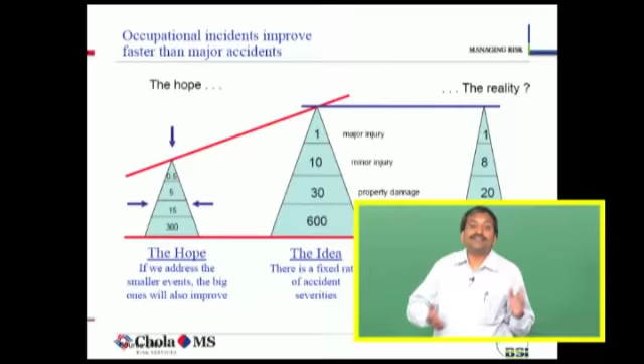That means if somebody has to break his hand or leg or something, before that there will be so many incidents, but people will not notice that this is happening - it is kind of a near miss, and then ultimately one big incident happens. This was a long time back, a study was done, but in process safety unfortunately the ratio is not so large - every 11 process incidents can result in a fatality. I hope you understand the difference.

Now a lot of research is going on about what is meant by process defect. If a safety relief valve pops up, is it an incident? Because it just popped up, pressure is more, it popped up and then again sat back, right? If it is continuously happening, then do we need to investigate? Is it an incident? So today there is no mechanism, or there is no way that we are capturing those process-related incidents. That is where the trick lies.

If the research is going on, how do we capture those process defects? Process defects - again you need to define what exactly you mean by process defect. If 1 kilogram of something comes out of an overflow, can it be called a process defect? Can it be failure of some XYZ mechanism? That is something we need to look at.

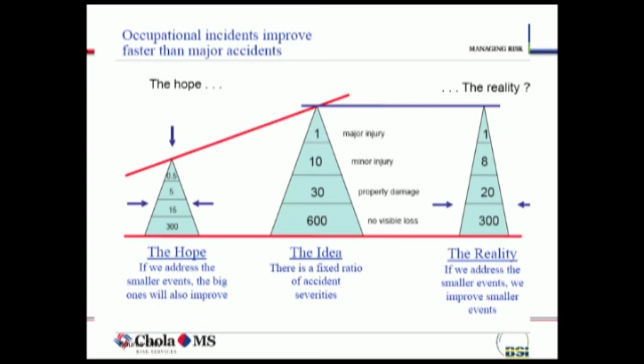So I hope you are able to get the relationship between the both. In process safety, the ratio is 11:1. In case of industrial safety, normal safety, the ratio is anywhere between 300 to 600 to 1. So this is the major difference you find, that is the reason you find that we need to concentrate more on the process safety area.

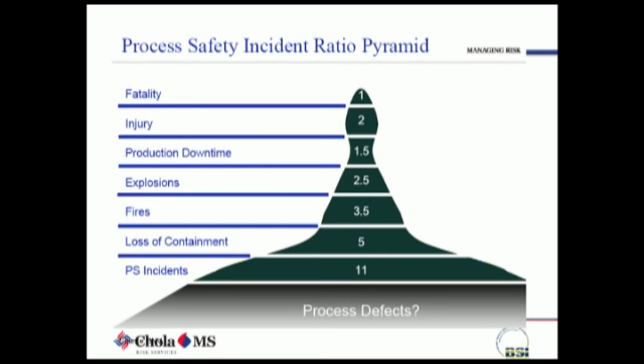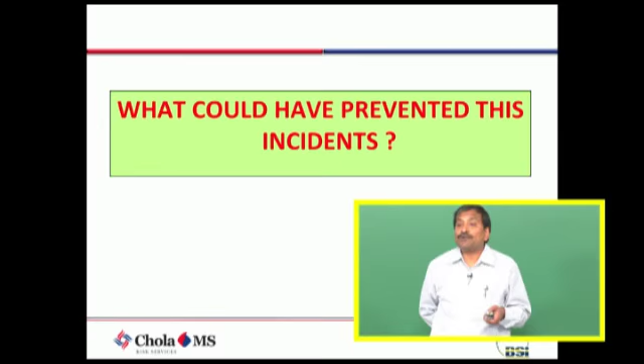Now, what could have prevented these incidents from happening is something that question will ask. So just being aware about process safety, will it produce those results, or do we need to do something more, is something that is important.

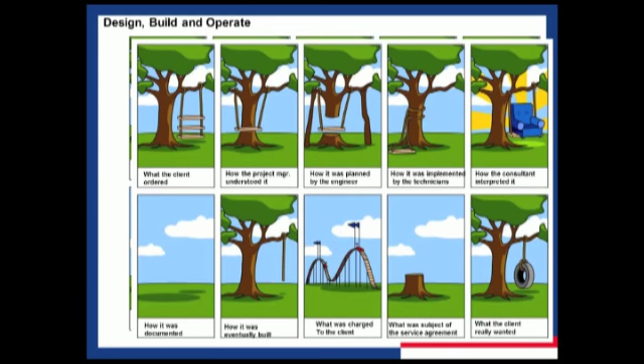Every time a designer designs things, everyone will have their own imagination to implement it, then in the process something else happens. So in process safety also you will find this kind of thing finally happens, and the design many times it fails.

So there is a broad definition of what is process safety management. I hope this was not covered earlier, correct? Covered? No. So what is process safety management? It says proactive and systematic identification, evaluation and mitigation or prevention of chemical releases that could occur as a result of failures in process, procedures or equipment.

So broadly what it is saying - process means the hardware part of it, say temperature, pressure and other things. Procedures is the software part of it, SOP, safe operating procedures, or how do we run the plant kind of thing, and equipment. So what can result in a chemical release?

The point that needs to be noted here is that process safety management quietly evolved as a result of major disasters in the chemical industry. But now the trend is that process safety management is getting applied even to the engineering industry, even to oil and gas, even to steel it is getting introduced.

Because process safety management talks about proactive and systematic identification, evaluation and mitigation of process, procedures or equipment, all three things are there even in a steel plant.

If you look at some of the steel plants, there is a big blast furnace gas handling system. They also generate oxygen in a big way. They also handle molten metal in a big way, which has a lot of hazardous properties and a lot of chances for big incidents to happen.

So in broad, what they are saying is process safety is a blend of engineering and management skills focused on preventing catastrophic accidents, particularly explosions, fires and toxic releases associated with the use of chemicals and petroleum products.

So if you recall, I differentiated between a normal safety incident and a process safety incident. Do you remember those two words? What are the two words I talked about? Anyway, difficult to remember, I will give you a hint - one is probability and severity, right?

In PSM, how are probability and severity linked? Probability is low, severity is high. In safety incidents, probability is high and severity is low.

That's the 600:1, 1:1 ratio. So that is what we are saying - catastrophic accidents means the severity is quite large. We are not talking about a small 1 kg vessel rupture or anything. We are talking about big releases, big incidents which can cause a lot of loss of lives and property.

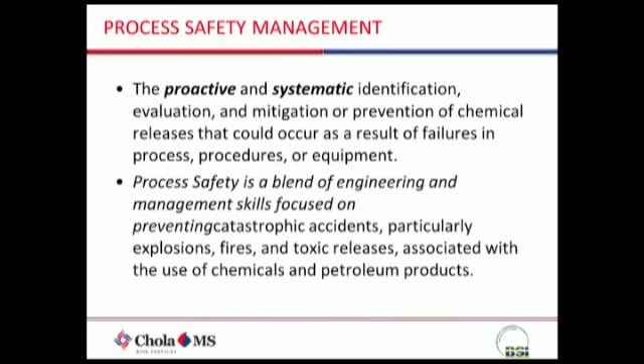See, actually after the Bhopal gas tragedy, a lot of work started on PSM, because one thing that was felt is that normal safety systems are not able to predict this kind of major accident. So there should be something more that needs to be done.

So we will come to the elements part of it. In the elements, you will find a lot of elements look very simple, and you will wonder why PSM gives a different color, but the way it is applied is something which makes a difference.

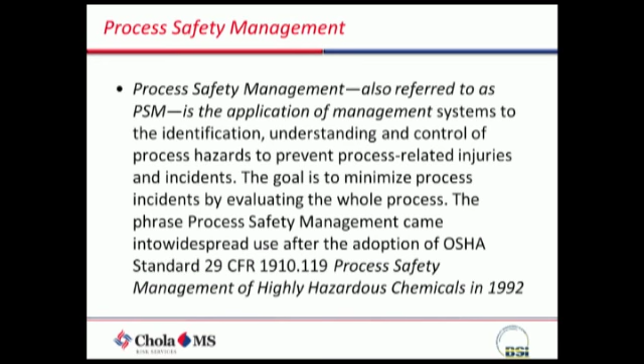So because the system is not functioning properly, I think you have seen that video of Texas refinery, where you have seen that the basic measurement was not proper, and it was filled for more level than what the instrument can gauge and all that. So they are relating it with abnormal conditions that can happen because the process conditions are not correctly controlled.

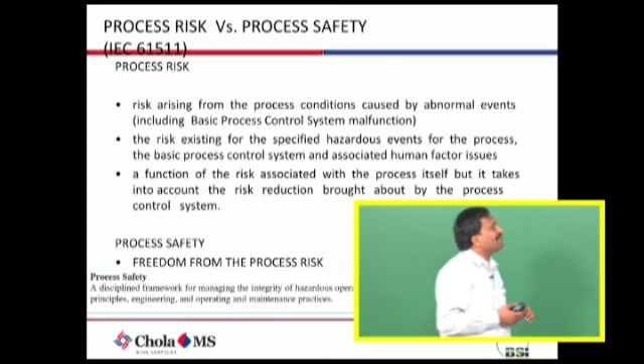Then the risk existing for specified hazardous process events for the process, the basic process control system and associated human factor issues, is a function of the risk associated with the process itself, but takes into account the risk reduction brought about by the process control system.

See, what happens is, when you broadly define the risk, everyone will ask, okay, so we have this control system. If this control system fails, then we have some other containment system. Even if this containment system is having some problem, then we have other control systems to mitigate the risk. Then why should we worry so much? So what happens in process safety is when you systematically evaluate the various risks, you will also give credit to the existing risk control measures, right.

I will make it very simple. Suppose this building is there, what can go wrong in this studio? It can catch fire. Now if it catches fire, then what happens? Everything gets destroyed, right. So what is the basic control measure that is there? Fire extinguisher is after the fire starts, but first detecting that there is a fire. So you will find some smoke detectors and other things.

So that is the fundamental thing that you detect, that is one level of control. So the idea is, if you detect a fire, then your fire extinguisher will come into picture, which you will go out and bring it inside and then fight the fire, because any fire will start in an incipient way and then goes on to become something very big, correct.

So then if that fails, like your extinguisher has failed, then what else can be done? The building will have either, okay, in this floor you do not have sprinkler system, but sometimes the sprinkler system itself will operate. That is the second level. Suppose that also fails, like something happens, then you have hydrant system where the people can apply water and then put out the fire before the thing.

Suppose you have a vessel with an exothermic reaction. Now, what happens if the exothermic reaction is not controlled? Runaway can happen, there could be an explosion and other things. So what kind of process control would you like to adopt? First of all, we would like to adopt controlled addition itself. How does an exothermic reaction happen when you have two chemicals added together? So control is one measure. Then second thing is, somebody may argue that addition can be faster, or the valve has malfunctioned, so more material is getting added, so pressure is developing.

So what will we have? We will provide a relief - we may provide a rupture disc, or we may provide a relief valve, whatever it is. So before reaching that stage, we will measure temperature, measure pressure, or we may have a dump tank if the reaction is very explosive, so that when a certain pressure is reached, the dump tank will open and everything falls into the dump tank and the reaction is blocked. So we take into account various risk reduction measures based on criticality and acceptable risk, and try to control this. That is where they are talking about process risk.

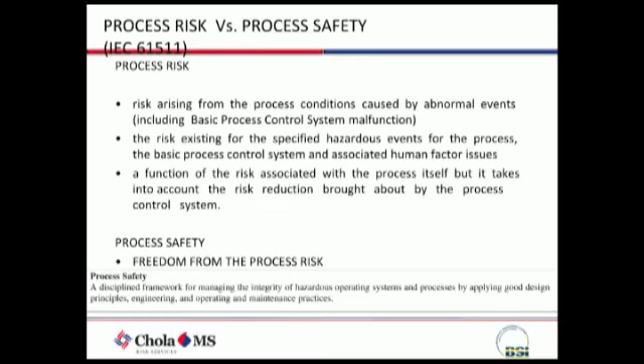So process risk is a subset of process safety management. Why is it being introduced? This is being introduced to say that process safety principles are now getting applied even to the control points also. It is not just the layout, not just the vessel, not just the procedures - it is even now getting extended to the control systems itself.

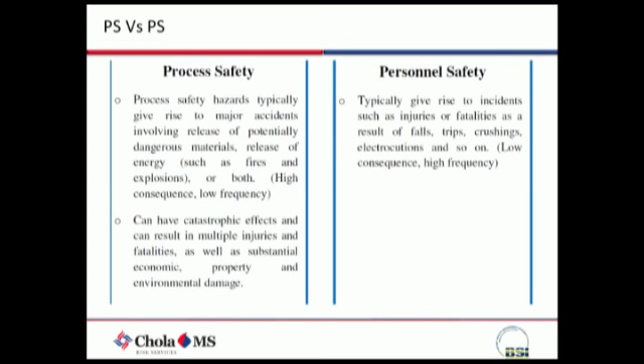Now there is a comparison which I already mentioned to you - process safety typically gives rise to major accidents, while personnel safety typically gives rise to incidents such as injuries and fatalities. So the thing you need to know here is that on both sides fatalities happen. It is not that only slip, trip and fall flows into personnel safety - both sides can have fatalities, but the severity will be quite high in the process safety case.

Most process safety frameworks, like the injury triangle or safety triangle, have also constituted what is called the process safety triangle. So the topmost thing, when you call it a process safety incident, will primarily involve loss of primary containment. That means you have a vessel, and its contents have come out - that is the major thing that can happen.

So those are all near misses including demands on safety systems. Your valve or pump is supposed to close at 17.89, but it has touched 18 and triggered. That means maybe sediment level is more - there could be so many other things which have resulted in that, or the valve is passing, or there is a defect in the gauge.

So from the bottommost, if you see, insufficient operating discipline, not following procedures, can lead to near misses including demands on safety system, which can result in loss of primary containment, and finally leading to a process safety incident. That is how the sequence follows.

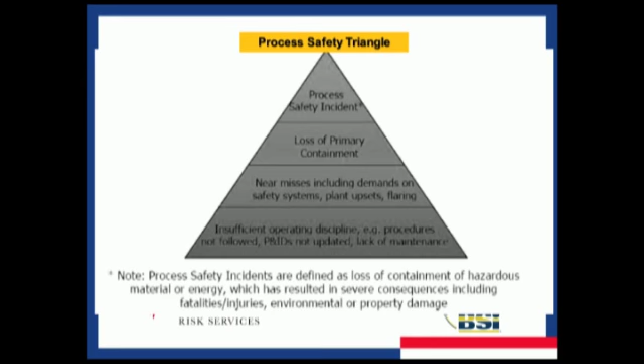Now there are some myths, because PSM, to be very honest, is not yet accepted in India. I would say still only a handful of companies are following PSM, because of a variety of reasons. One is lack of understanding, lack of expertise, and third is that we also have insufficient knowledge on some of these things. A fifth important point to keep in mind is that our legislation does not yet mandate PSM. So we are all legislation-driven people - we do not follow certain things because it is required or because it is good practice to follow.

We still think, quote unquote, that something needs to be done because the government said so, or because we need to do it. So PSM is not yet mandatory.

So some of the myths associated with PSM: a lot of people think it is a performance-based approach, or that one approach is to do whatever it takes on your facility not to have accidents. Some people think like that. No - PSM is an analytical tool focused on preventing release of highly hazardous chemicals, and some people have a misconception that PSM deals with trips and falls.

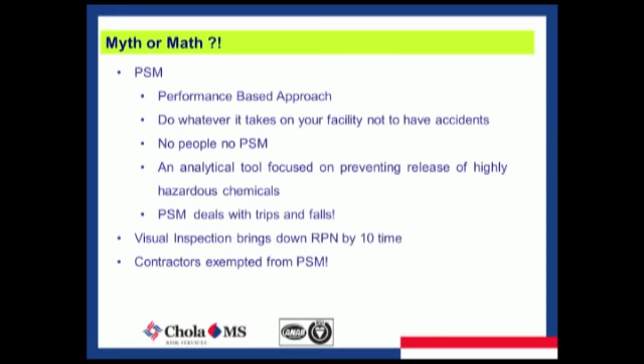Another important myth is that contractors are exempted from PSM, because if you see some of the factories now, except for core operations, the rest is all run by contractors. Even public sector undertakings - a lot of things are run by contractors. So you can't differentiate contractors from the main operators. Contractors are also required to follow this.

So a typical PSM - for example, if you follow PSM processes, so many things we talk about when it comes to maintenance. This you will not find in the normal approach to safety management. When you follow PSM, you will do that.

It will talk about insulation healthiness. Insulation healthiness is a big topic by itself - how do you measure healthiness, because it is all closed? One easy way of measuring insulation healthiness is doing thermography. When you do thermography, it gives a profile of how the insulation is - whether the temperature gradient is uniform, or wherever there is insulation weakness, you will find the temperature gradient showing more.

So what happens is that, and the other most important thing which is neglected in 9 out of 10 companies, is hose management. You will have lot of places with unloading hoses, lot of places with connections, but nobody has a clue on hose management.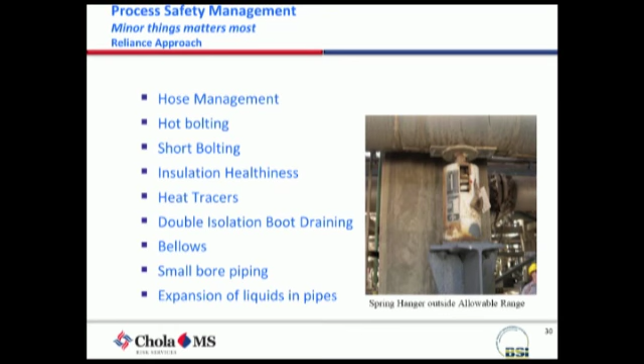So PSM, while it talks about minimizing incidents arising out of failures of all this, ask the crucial question: how are you doing hose management in your company? You will find that no answers will be forthcoming. Most of it is that we replace hoses when they fail. We do not check for hydraulic pressure, we do not do periodic inspection, we do not check for compatibility. Lot of things can happen because of that.

Okay, just to give further understanding, how does an indicator look like? In a personal safety program, you will talk about first aid, how many first aid cases, hours lost to injuries, as per the Factories Act you might have heard about lost time injuries and all that. So those things will be talked about, and recorded incidents that could have resulted in personal injury, exposure due to improper non-use of PPEs. These are the things that will be talked about.

But when the same company talks about process safety, it will talk about number of failures of critical equipment, because in a plant not everything is critical equipment. There are some things you need to monitor very closely, like an ammonia compressor, or a cooling water circuit for an ethylene cracker. Those are the critical equipment. So you will see the number of failures of critical equipment, incidents of loss of containment, right.

Earlier, when we were only talking about safety, we never talked about leaks. We used to take it as slip and fall, trip and fall, because something is leaking kind of thing. We never asked the question, why has this leak happened, is it 1 kg or 5 kg or 10 kg, and is it trying to indicate to us that something is wrong.

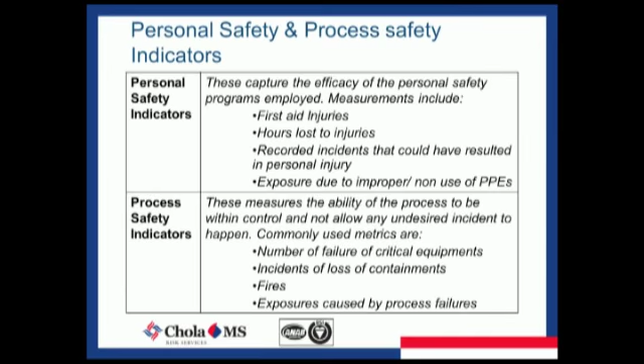Then fires, exposures caused by process failures. See, that means if there is a sudden release of a toxic chemical from the process plant, we are asking you to record it as an incident, a process safety incident. Do not treat it as the guys not wearing PPE causing an accident. We are saying that exposure caused by process failure is something which needs to be separately indicated.

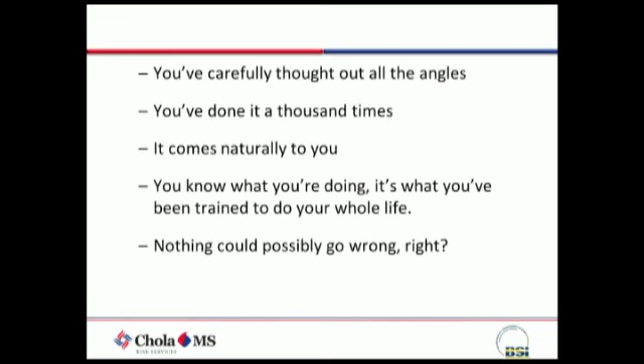So I will show you more of that. The underlying point I am trying to say is that we may do so many things, think through the process, review the drawings, do safety engineering studies, install so many things, and feel we have done everything right, but still incidents like this can happen.

So quickly, before we go into some more topics of PSM, I thought I should take you through a couple of case studies. This is one thing which, again after doing so many things, a major incident happened in Jaipur. Why I am citing this case is that this is one of the big incidents that happened in the recent past, it was in 2009.

Now, if you relate this, those of you who are interested can download a small report called the MB Lal committee report. Dipin, please circulate it to the participants, it is available online. If you do not get it, ask me. It is a small document, about 29 or 30 pages. I urge you to read that. So this is after the incident. Now, after this incident, lots of changes happened in the Indian oil and gas industry, lots of studies, new standards, and OISD is working on some more criteria.

So the end result is what? One incident like this happened, where 11 persons were killed, 45 persons were injured, and apart from that, I think it is one of the highest insurance losses ever in the Indian insurance industry. Close to 500 crores was paid as compensation for the loss suffered by IOCL.

Not only that, because of this incident, IOCL couldn't place its insurance cover for a number of months in the international market, because everyone said, you have such large potential, your safety record is so bad, and you see the kind of loss that has happened. So it was bad publicity for the company. Why? Because look, how many days did the fire burn? 11 days. Finally they decided to let it burn because they couldn't find a technology to contain it.

Now you understand the importance of PSM. We think that we can put it off, but before forces like fire, wind and natural calamities, whatever we have designed is not able to withstand.

Now if you look at the genesis of this incident, leakage from the MS tank valve resulted in leakage for 75 minutes.

Now what kind of questions come to your mind when you read this point? What is your immediate thought? Somebody says it leaked for 75 minutes - why wasn't it discovered? When you say checked, you're asking why it was allowed to leak for 75 minutes before they realized it leaked. Does that question come to mind? Sensor might have gone wrong. What if the sensor isn't there at all? Both cases are possible. If the sensor hasn't gone wrong, then either it's not maintained, or it's not placed where the leak occurred.

Then the other question is why was the fire allowed to grow that big - meaning our emergency response. Because any fire starts with a leak, then a source of ignition, and then results in fire, but we were not able to control it. Actually the fire intensity was so much that 750 meters from this depot, the ground temperature was 53 degrees. So you can imagine the kind of heat that was generated. Finally they decided they couldn't fight this fire and allowed it to burn, because there's no technology to put out fires of that scale. So they tried to let it burn in a controlled way so it wouldn't have a catastrophic explosion.

Similarly, this incident is from 2009. Before that there was one more incident of similar nature, but not in our country, in the UK, around 2005 - similar overflow and leak. You can see here, overflow at 550 meter cubes per hour was the pumping rate. So imagine pumping at that rate for more than half an hour, how much quantity would have come out.

Now both these incidents - why I'm sharing this - triggered a mass debate among controlling authorities, designers, safety engineers, environmentalists, everyone, on how we treat some of these things. People started questioning that when we have so many systems, how do we ensure the system doesn't fail, because you're putting together a lot of systems. You're saying a valve should be there, there should be a detector, an overflow mechanism, a control room and all that, but all these things are failing, and you have massive releases like this, which is shaking people's confidence in having facilities of that large nature.

So these two incidents, if you look at it, resulted in a lot of legislation across the world after the incidents.

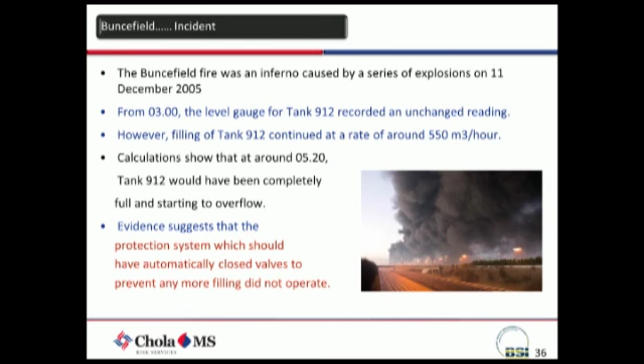In case of the Jaipur incident, after the MB Lal committee report, all the oil installations, meaning oil depots, numbering around 1500, were asked to do safety studies like QRA, HAZOP and other things, and also go for safety integrity level instruments of level 3 or level 4.

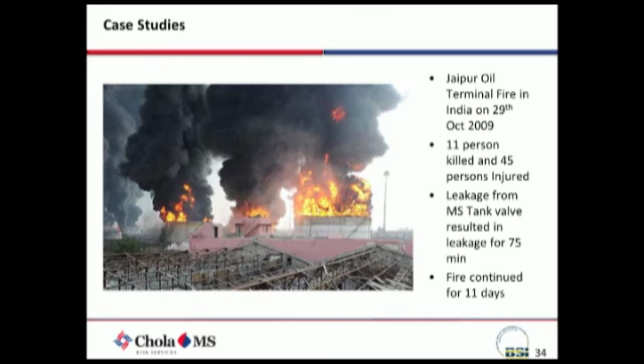So even after 5 or 6 years now, I would say only 10% of the installations were able to do complete studies and implement these things. So it takes a long process. It's not that you wish and replace a valve and the safety level rises up. It takes a lot of time for these things to move up.

So this is one, I hope you are aware of this graph. I think you were asked about major incidents and the link with legislation.

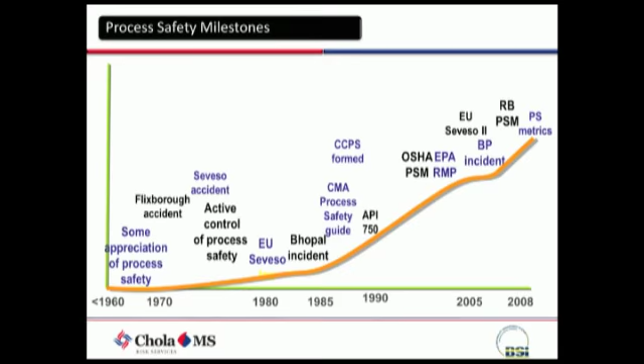Then in 2008 risk based PSM and PS metrics came. So as more incidents happen, you will find that the PSM process is evolving. I would say PSM is still a continuous step in a continuous process that is happening.

So, one of the things, yeah, okay. So we are continuing up to 6 o'clock. Okay, right.

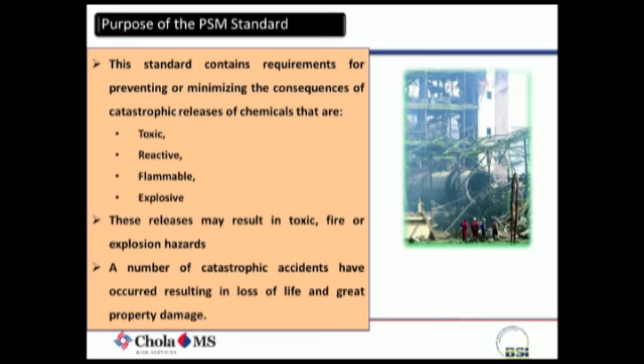So if you look at the PSM standard, what is the purpose? The purpose is the requirement of preventing or minimizing the consequences of catastrophic release of chemicals that are toxic, reactive, flammable, explosive, because there are so many chemicals in this world. There is a rough estimate that more than 3000 chemicals are there.

Now, two things are important here. Even our body has got a lot of chemicals inside for digestive processes, maintaining balance, imbalance and all that. So there cannot be standards regulating all of these things. We need to define what is applicable to us, otherwise PSM standard would be applicable to our body also, correct.

So what we are saying here is that PSM standard does not mean it is prescriptive in kind. It gives broadly the outlines and leaves it to you on drawing up what processes you need to adopt. So what a performance based standard is, is something being shown here.

Focus on what must be done rather than how it should be done. So they will say you adopt a PSM standard, these should be the elements. You can add more elements, or say these elements I will focus on in my company, or these elements I do not focus on. It will not say this is how success looks like, that is very important.

The difference between performance based and the more traditional prescriptive standard is that performance based standards concentrate on the result, while prescriptive standards set out the details of the process which may or may not achieve the desired result. For example, they will say the spacing between two detectors should be 750 mm, but whether it will really prevent the fire or not, nobody can say, because there are so many variants.

These are the various elements of PSM. So what does PSM finally come down to? These are the elements of PSM: employee participation, process safety information, process hazard analysis, operating procedures, training, contractor safety, pre-startup safety review, mechanical integrity, hot work permits, management of change, incident investigation, emergency planning, compliance safety audits, and trade secrets.

Now, among these things, the most important for chemical engineers is process hazard analysis. That is where the rest of the classes focus, if you see the syllabus, because the most important thing is process hazard analysis, PHA. The various safety engineering techniques you use, I will show you a little later. There are more than, my count is a little old, but my guess now is about 50 different techniques in safety engineering itself.

Each of these techniques will identify the process hazard in different ways. No one technique can identify all the hazards that are there. Okay, then these are all related.

Then the other important thing you need to concentrate on, if you want to become a PSM engineer, is mechanical integrity. Mechanical integrity is all about how do we ensure optimal performance from the machinery that we have, as simple as that. There is a big program, and each of the issues with respect to mechanical integrity and the PSM part of it is the most interesting part, because you will find routinely that this is the breach that happens in plants, which can result in failure of various equipment, resulting in major losses.

Then of course, the next in the line of importance is contractor safety. Pre-startup safety review is when the plant is all built and you are about to take the chemicals in, then you see whether what you designed is actually there in the field or not. So you may ask, can it happen like that?

Yes, it will happen. In the pre-startup safety review, lots of issues will come up, and I will share with you how in a refinery we found more than 160 points related to process safety when we did a pre-startup safety review. A lot of points will be assumed that it will be done in such a fashion, but it won't, which results in a situation where you need to take a call whether you start up today or you won't start up. I will give you a simple example.

Recently it happened in one of the process plants. There is a compressor. Now, the compressor tripping mechanism says you have 3 sensors, and 2 out of 3 sensors have to say that there is a fault. So it is called what then? 2 out of 3 voting, correct? When 2 out of 3 voting is there, yes, now the compressor has to trip.

Now, what happened? It is an imported compressor. One of the sensors, while in transportation, what happened we do not know, but it stopped working. So the plant has asked for a deviation. Can we go for 1 out of 2 voting, right? They just want to change the software, then can we go for 1 out of 2 voting. This is temporary, but they have not defined what temporary means. It could be 3 months, it could be 6 months, it could be 1 year.

Now the choice is for you, that is coming up in pre-startup safety review. So they said the plant is ready to be commissioned, but the logic now has changed. It is 1 out of 2. So is it okay to say okay, or should we discuss more? What is your opinion?

If ready stock is there, then you can always do that, but what I am saying is pre-startup safety review means the plant is yet to start, that means it is a brand new plant. So you will not have spares for everything, maybe over a period of time you will build that. Your supplier says it will take some time, that some time is 3 months or it could be 6 months.

So if this element is not strong, then what happens? A few people will argue for a change, you will go ahead for the change, and tomorrow if the compressor fails, then what will the manufacturer say? You never asked me. You only said one sensor has gone, I never asked you to go ahead and do that, right. So the production and project people will always press for startup, because for them deadlines, project completion, all that will be there.

They will hand over the project and go away, but the operating people will be left with something which does not work or it fails. So they have to be answerable. So management of change is something which talks about that.

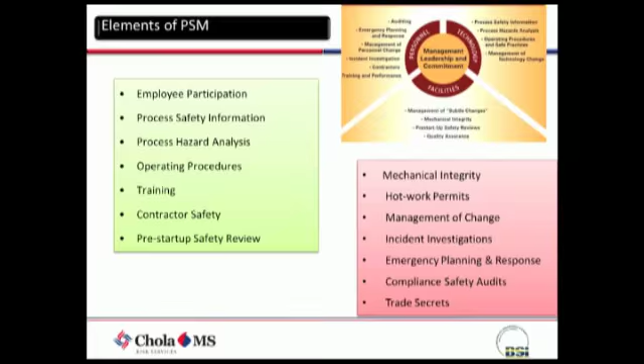So we have talked about process hazard analysis for you to focus on, mechanical integrity, management of change, then to an extent contractor safety is also very important. All said and done, you may say their integration is proper, we have done induction, we have done XYZ and all that, but contractor is a little distance from the normal person, and sometimes they come for only temporary work and may not understand the philosophy of the way you are operating, that can result in major incidents. And if you look at major incidents that have happened, they all more or less involved contractors. So that is the reason why in PSM the contractor safety as an element has been brought.

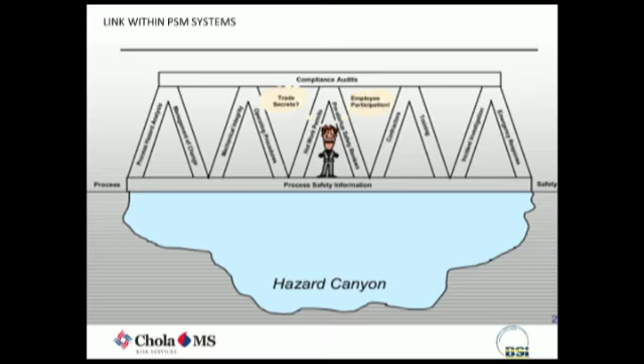So this is how the link is there between the various elements. You can see here process safety information is something which is a kind of a link between all the elements, and compliance audits which is sitting on the top. For everything you do, you need to comply with something. There are some exemptions, like it is not applied to retail facilities or remote facilities, some things like that, but otherwise it can be applied to anything.

Now we will discuss a little bit more about some of these elements before we go into some things on QRA, okay, basic understanding. Anyway, there is a separate class on QRA which you will be using the software and other things.

Now, process safety information is something which is very critical and very difficult to assemble, especially in the old plants, because they would have lost records. A lot of it is done because it is done that way, and then nobody will have a clue on this process safety information. So the written information should be on hazards of the process, technology of the process, and the equipment in the process. This may appear very simple, but I will cite an investigation which we have done about 3 or 4 years back.

It is a very simple process, but it has all the elements of everything I am talking about. So this plant located south of Chennai was in operation for more than 25 years. It is a simple process. They mine the sand and the ore from a beach, and put it into a big steel vessel of 6 tons, maybe about 2.5 meters by 1.5 meters. They put this material into that and add sulfuric acid.

They rotate it for 5 days at a pressure. After that they cool it, and then they dump the material from the bottom and send it to further processing. So do you find that the hazard is there? It is all extracted from mother earth, and sulfuric acid is added, that is all, and you do not find fumes, you do not find anything, and it has been in operation for 25 years. Now, do you feel safe or unsafe?

I am mixing 6 tons of mother earth material with say 500 liters of sulfuric acid. It all disappears into that, and it is just rotated at that speed. The operator closes it and comes back after 3 or 4 days. That kind of vessel, there are some 20 of them. So at any given point of time, one fellow will complete the process, and they have the work of removing, cleaning the other one and all that. But this has been going on for so many years.

So, they are not able to fathom out how this could happen, because there is no exothermic reaction expected. Imagine you pour sulfuric acid onto the ground, what happens? Some fumes would be there, but beyond that, do you expect an explosion? Okay, they will add steam also into that, but do you expect it?

So, the information they were not having is the hazards of the process. It was documented some 15-20 years back, but today that knowledge is not there. The technology of the process, why 5 days, why that pressure, why that temperature, nobody knew. There is no document now.

See, imagine your LKG books are with you? No. Suppose I ask you to take out subject number 2, lesson number 3, what did you do, meaning where is the information? There is no information. Plants, equipment, operators, everything happens like that, over a period of time.

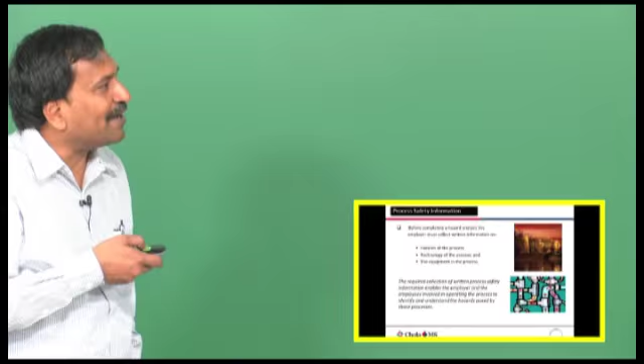The equipment in the process also has so many modifications, if you see all those elements. So nothing was there in the plant, but for you to do investigation, all that is required.

You require a standard operating procedure, you want to know the logic of doing it for 5 days, you want to know what is the reaction kinetics, what are the process control information, who decided this is the way this vessel will operate, what is the mechanical integrity of the equipment, what pressure it is designed for, because it just lifted off, the bolts and everything got sheared off. Now the evidence is there that it has gone 110 meters and landed within their premises, broken.

So there is an opening. Now this is the information, but when you ask all this, they said we do not have it, we do not know. We only have some documents showing how much material we are putting in, how much sulfuric acid, what time, that kind of sheets are only there.

Maybe we have to dig into archives and do that. So, process safety information is very critical for doing the process hazard analysis, right.

This usually starts with the design. It starts with the design of equipment, consideration of chemicals, consideration of the reactants, from R&D to the scale-up operations, the batch processes, and then the design. Everything comes into that picture.

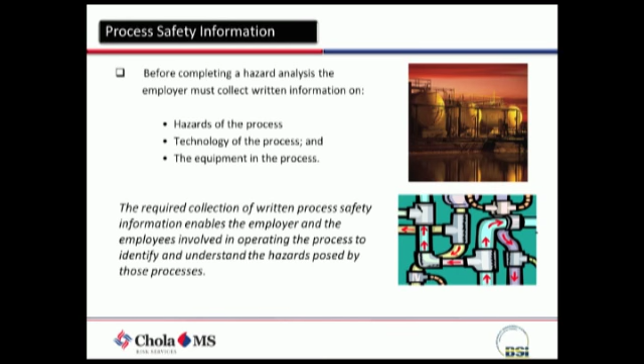Then the equipment in the process, how did you select the equipment, what were the limitations, what design features did the supplier consider before supplying, all that is important. So process safety information forms a key thing in PHA as well as in management of change, because if you are changing something, you need to know why that is going to affect it.

Toxicity information, the basic thing, have you ever seen a material safety data sheet? You are all familiar. What is the latest in MSDS, what is it called now? Are you aware? It is called the International Chemical Safety Card or something.

The European Union has come out with that new thing, which is even more simple than MSDS, because sometimes the MSDS can be very lengthy, 5 pages, 10 pages, difficult to find information. Now in India there are standards available, even in the Factories Act, in the backside annexure they have given the MSDS information, basically talking about physical reactivity, corrosivity and all that.

In our earlier days, when I was young like you, one of the first activities we did was to prepare MSDS. Even though MSDS for sulfuric acid is there, MSDS for XYZ is there, the process of preparing MSDS exposes you to so many hazards, making you familiar with the hazards of various chemicals.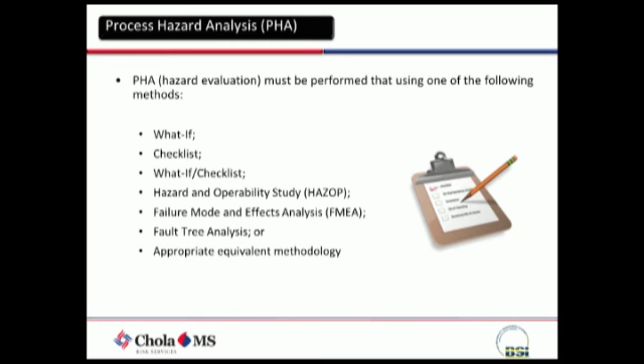PHA, some part of it will be talked about here. They have only talked about what-if, HAZOP, FMEA, FTA, but there are a lot of other techniques. I just wanted to show you these are the techniques I am talking about. There are, if you see, 1, 2, 3, 4, 5, 6, 7 different stages of the plant we are talking about: concept, process, design, commissioning, operations, modification and decommissioning. So at all 7 stages of the plant you can use different techniques to understand hazards associated with its operations. This is one you can see here.

Now how many Chola MS risk offers is this, I would not say even 15-20%, right. This is again a little old, I would say dates back at least 3 years. Now in this, at least as I know, 7 or 8 more studies have been added. So if somebody wants to specialize in the area of PSM, I am not saying he should be familiar with all that, because by the time he gets familiar then he can retire. So he should have at least familiarity with 4 or 5 techniques minimum, at a professional level.

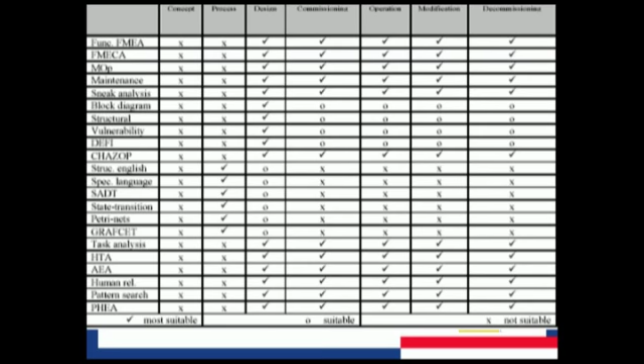So the idea of showing this slide is that at each of the stages of the plant you can apply different techniques to get more information about the hazards associated with those operations. Hope it is clear. So at this point it is enough for you to know these are the techniques available. My favorite technique is always about inherent safe design, which is very interesting, and it asks very pertinent questions on how you ensure safety inherently in the process itself. It goes much deeper than many other techniques you see here.

Now after so many years, oil companies have started adopting inherent safe design as a prerequisite before they go into the design. They ask designers to prove they have considered these techniques. For example, if there is an end product, starting stage, end product, the intermediate storage is there. Like in your Bhopal gas tragedy, what happened, your MIC is an intermediate product, it is not the end product, do you agree with me? So if it is inherently safe design, they would have asked why the hell you want an intermediate stage, or it could be one step before it becomes really toxic, correct.

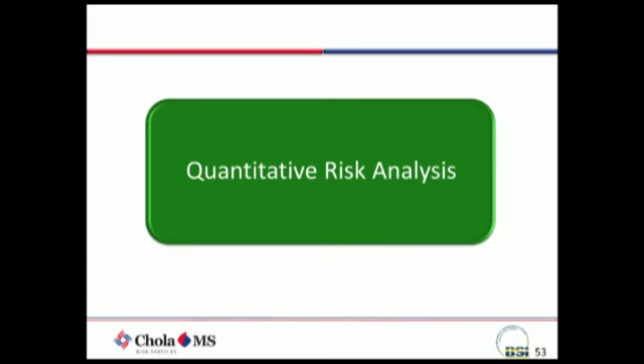We have some more time, or do we need to close? Five minutes more, okay. Can we just go into the QRA, because this is the most interesting thing, and I will only broadly give the idea, because my subsequent colleagues who are going to come, Arul Arasu and others, will take complete sessions on this.

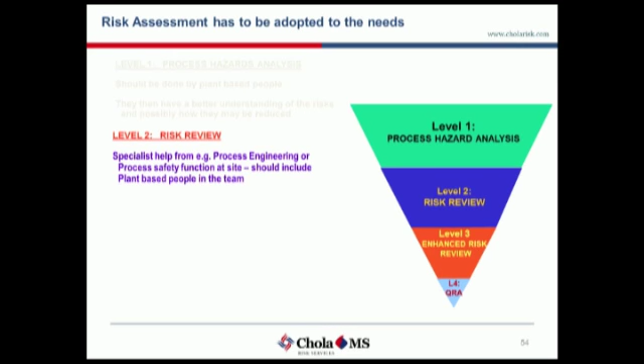So we are saying that risk assessment has to be based on the plant. We are saying level 1 is process hazard analysis, it should be done by plant-based people because they understand the risk and possibility of how they can be reduced, they may have their views. Then we are saying risk review specialists from process engineering or process safety function at site should include plant-based people in the team. Then enhanced risk review and quantitative risk assessment. So we are saying QRA should be done with outside help.

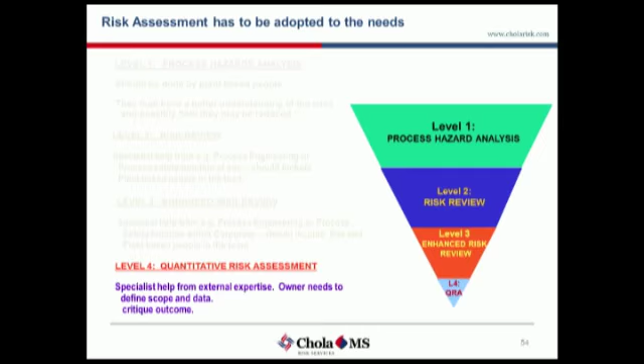Now, out of all the techniques of PHA, QRA is something which has gained a lot of popularity, not because it deals with the numbers, but because it is able to tell people how big the problem is going to be.

Like suppose you have 3000 tons of ammonia. Yes, ammonia is hazardous and it can leak, but will it cause a problem 10 kilometers away, 5 kilometers away, or just 10 meters away?

So QRA will help you determine how far the problem can reach. It also has an interesting feature - people invest a lot in technology to mitigate hazards. Say you take the same ammonia tank. One way of knocking down ammonia vapor when it leaks is to have a water curtain. If the ammonia vapor is leaking and you have a big water curtain around the storage and start it, the vapor contacts the water and some of it gets knocked down.

Now there is risk reduction. Whether the risk is coming into the acceptable range or not is something you want to know - whether one water curtain is okay, or two water curtains are okay, or three are required. How do I determine that? QRA helps you understand in numbers how much risk you are able to bring down.

So what is the solution for this fight? There is no solution - you have to accept risk. One point I want to tell you in life: there is nothing called zero risk, you have to forget about that. So how much percentage of risk... we'll come to that, hold on. That is where the concept of ALARP will come into picture - as low as reasonably practical.

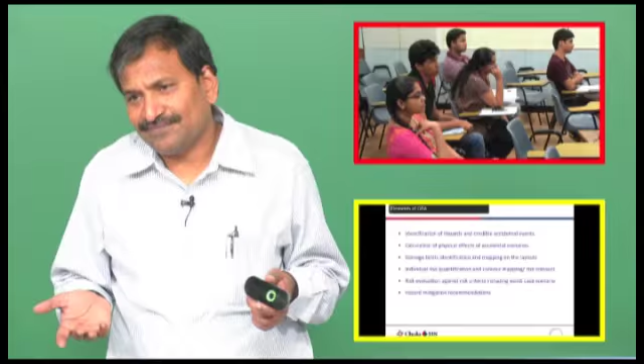As low as reasonably practical. So some risk you need to accept, correct? Do you drive a motorcycle, a car, or a cycle? Car you drive. So what is the safety feature? A car can knock down anyone, no? So what is the safety feature?

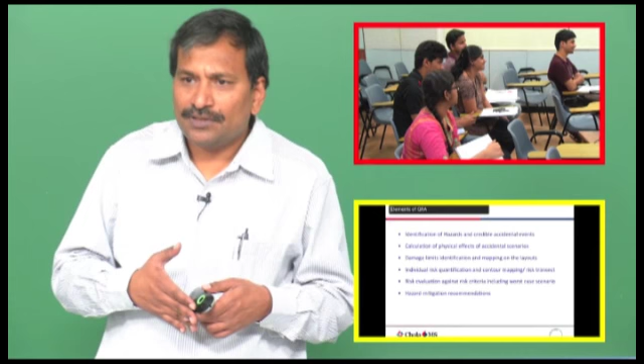A brake. So suppose you argue a brake can fail, the hydraulic system can leak, and then I press at the same time - it cannot fail simultaneously. But then the failure rate is what?

Failure rate is what? Maybe 1 in a lakh or 10 lakh times you press, then it will fail. It won't fail every time you press it. Now, to avoid that, you say, I will have maintenance, I will go for servicing, I will change the oil, I will check the pressure, I will check the interplay. So every time you do any of those things, your probability is changing. The failure rate keeps going up, but the moment you check it, it comes to almost near 0 - it is never exactly 0, that is again an imagination figure.

So even in case of ammonia, pipeline over another pipeline is the accepted solution. Now, you may argue a missile can come and hit, but how often will a missile come?

You haven't faced war in the last how many years? Ma'am, you are in Chennai, right? So when did the last war in Chennai happen? 1799. Now which year are we in? 2014. How many years have passed? 215, 216 years are over. So is it not safe to assume that in the next 100 years there will not be a war here?

Identification of hazards and credible accidental events. I also have to mention there is an element of subjectivity in all this, I will admit that, but you somewhere have to make assumptions. You can't correctly predict what can go wrong - if we could, we would be equal to God or whoever it is. We have to say this pipeline is there, once in 10 years it will fail, because history tells us, and we also know if you do not maintain it because of operation and other things, it can fail.

Then calculation of physical effects of accidental scenarios like vapor cloud explosion, fires, and toxic release we will talk about. Damage limits identification, mapping on the layout - so it will tell you 30 meters it will damage or 20 meters it will damage in case of 5 tons of chlorine leaking, how far it will go with this wind speed.

You can always argue this wind speed cannot happen - what if I have assumed 1.5 meters per second, what if it is 2.5 meters per second? This 1.5 meter per second is also selected based on the wind pattern - what is the majority wind that is blowing? Winds and all won't change over a period of time; 100 years, 200 years, it remains the same. For the wind pattern to change, it will take 500 to 1000 years. Anyway, our plant is not built for that long - any building is maximum 100 or 150 years. So we are talking about that time span.

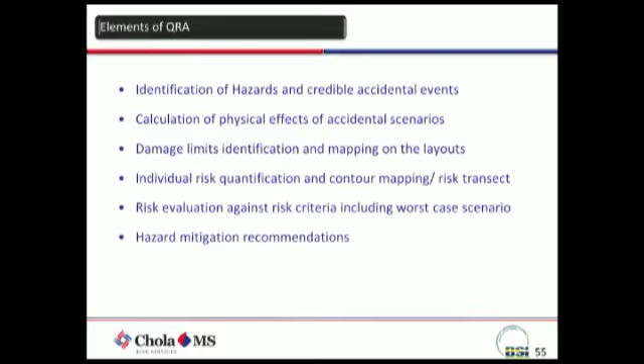Individual risk quantification and contour mapping, risk evaluation against risk criteria including worst case scenario, hazard mitigation recommendation. So we will try to broadly say yes, this is the way the hazard can be brought down. But again, as I mentioned, it cannot be brought down to 0 - it is an approximation, I admit this point.